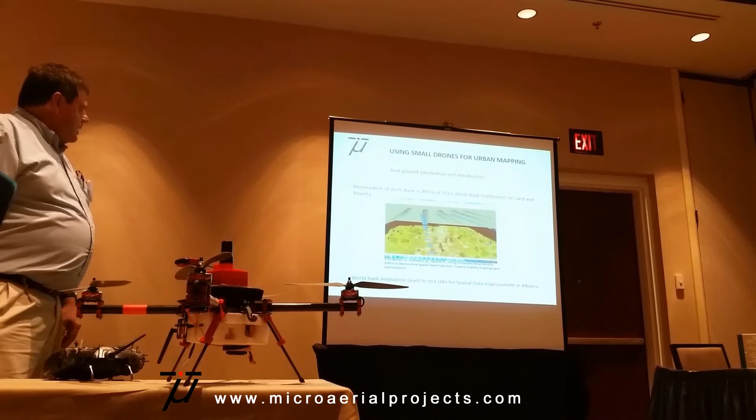In April 2013, we attended the annual World Bank Conference on Land and Poverty, myself and Grenville Barnes from the University of Florida, and we gave a paper on some of the work I did in Africa before, motivating for using small drones of this kind to do boundary adjudications and cadastral mapping. As a result of that, an employee of the World Bank applied for an innovation grant, got some money, and off we went to Albania.

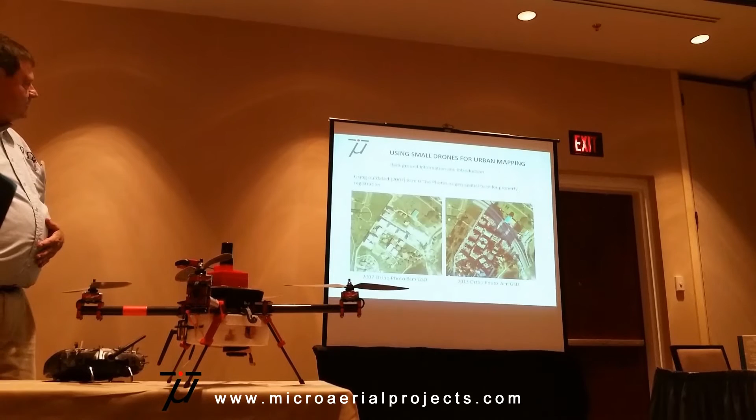Next slide please, Oliver. To test UAV technology in a scenario where they are desperate for any good quality geospatial data. Albania came out of communism in the early 90s. Before that, they had suffered years and years of really abusive dictatorship.

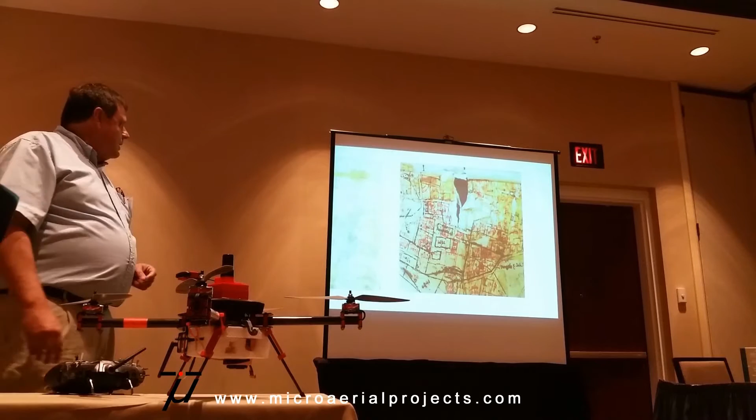The whole concept of property and ownership of property has always been, and is still, very new to them. Donors helped them digitize whatever communist cadastre they had. They were organized in kolkhozes, and these were supposed to be dissolved, and property was privatized, land was privatized. So they were given digital copies, but unfortunately somebody made the mistake of giving them hard copies as well. So instead of being forced to do their work digitally, they did it on inadequate hard copy material.

So this is how property is registered in Albania today, sorry, the light is a bit bright here. You'll see the value of the buildings going up on the basis of these property rights is substantial. But I would like to see any American title insurance company get involved in Albania. Anyway, they are desperate for better spatial data quality. Next one.

What's up, the computer's slow. So, what they are doing: since 2007, they were given countrywide coverage of orthophotos, in the urban areas at 8 centimeter resolution, which is rather high, and in the rural areas about 30 centimeter. They are supposed to use that orthophoto to perpetuate this property registration business.

In 2013, this just shows you why it's necessary that they get better data quality, not only improved but also updated. On the left-hand side here, you see some peri-urban development, and on the right-hand side, 6-7 years later, that's what it looks like. But they have no record of it. So when property gets registered now and subdivided, somebody just estimates little squares on those ugly maps that are shown. That's the background. Next one, Oliver.

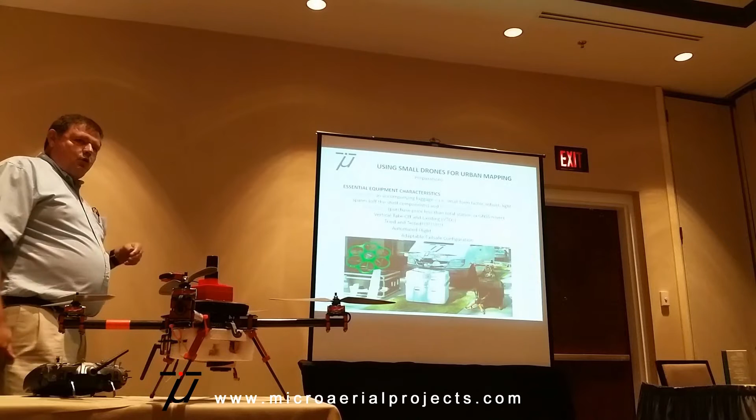Having been in this business rather early, there was not much choice in UAV platforms other than going to the Germans, basically. That's where the first multi-rotors came out. So we hung out with German proprietary manufacturers for quite a while and spent $50,000, $60,000 on single shell platforms, extremely expensive, very vulnerable, not repairable anywhere but in their own shops, subject to all sorts of import-export restrictions. So we knew we could not go there.

Apart from that, we also had to go to a developing country, so affordability was a big deal. Because time is so limited and establishment costs are so high, we had to go low cost.

We also wanted to make sure we didn't get blocked by proprietary resistance - we want a function like right now, and we don't want to put down money and wait another year until the function is released. Especially fail-safe measures are very important to an operator of UAVs - an operator has to carry the risk after all, not the manufacturer. So it was important to us that we had access to the brains of it all to be able to adapt the platform for our particular purposes.

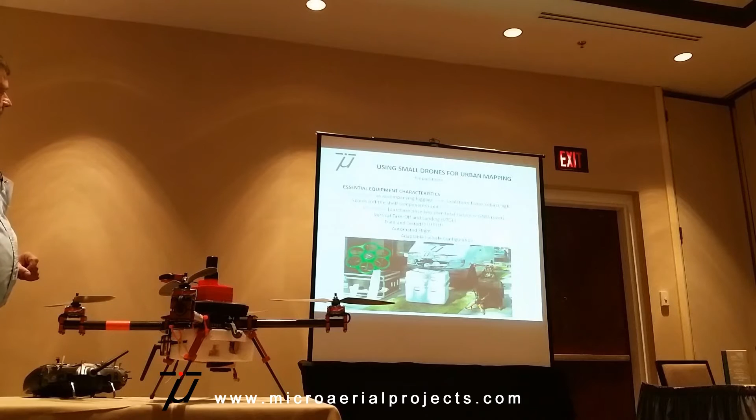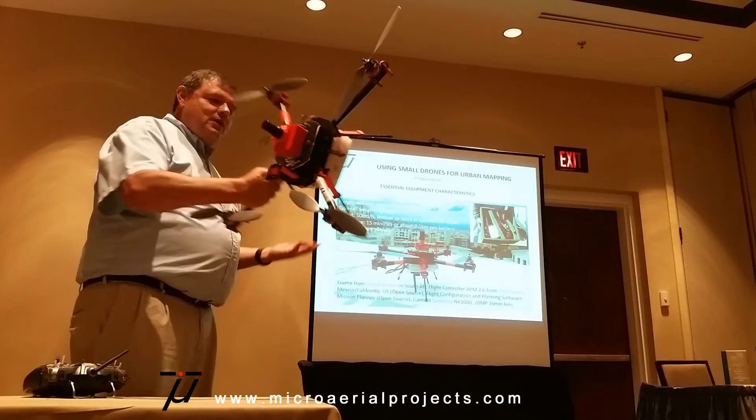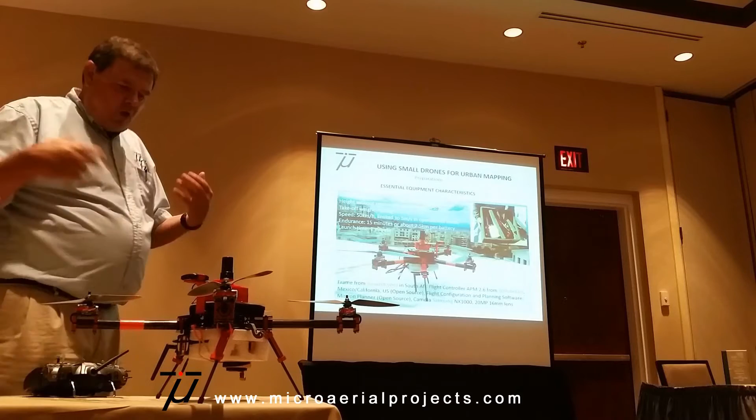So we ended up with this platform - feel free to come around later on, lift it. It's robust, okay? It's very simple, weighs less than 2.5 kilograms. We forfeited the gimbal - everybody talks about whether you have a 2 or 3 axis stabilized gimbal or something. None of that kind. We kept it as basic and as simple as possible for the obvious reason that you have to mitigate the risks. So you want to be as low in the sky, as light as possible, and as slow as possible.

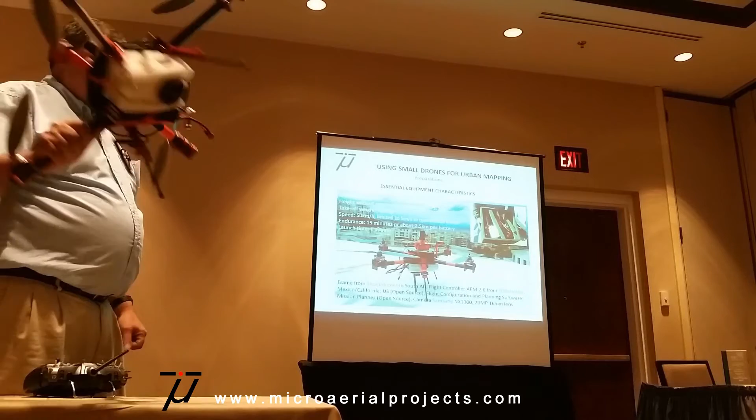That's how we came up with this platform, which is basically assembled from off-the-shelf components. Amazon.com gets you all of this stuff in front of your doorstep. The frame, for example, is made in South Africa, and not because I'm from there - we just happen to find them on the internet. The flight controller is made by 3DR in California, from Mexico.

It's totally open source. Cameras from Korea, of course - $450, 20 megapixels, very reliable piece of equipment. And what's more, no fancy housing or anything like that. This is hot exchangeable, so if I don't like this camera I can take another one. If a better model comes out tomorrow, I haven't got $2,100 sunk in this - I just change the sensor as and when sensor technology develops.

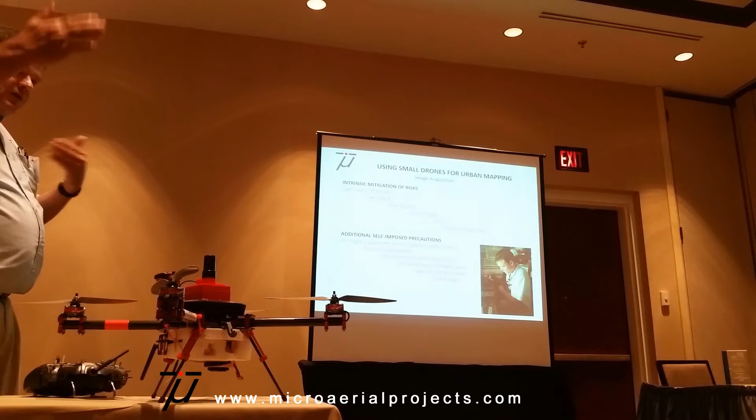So here are the intrinsic mitigation factors of risk. There is no regulation, there is nobody who's going to insure you, but the job has to be done. So what do you do? Keep the weight very low, keep the price low as well, low speeds, low altitude, keep line of sight so you see what's going on. You can't salvage anything in any case - if anything goes wrong, it just falls down, and you want to know where it fell down.

And then we have additional self-imposed precautions because there's no established set of rules, there's no handbook. So we devised our own kind of measures that we stick to ourselves.

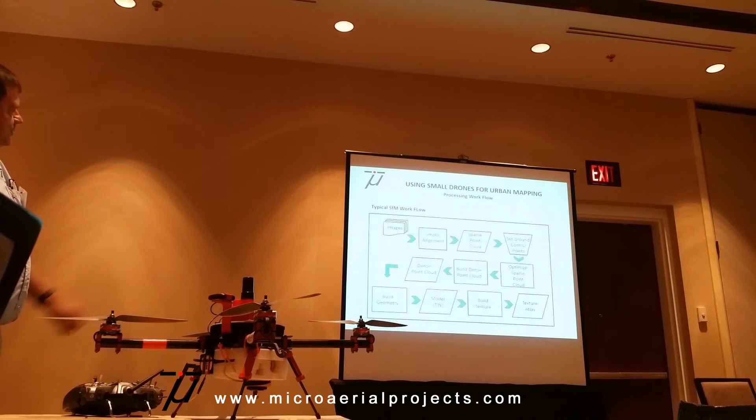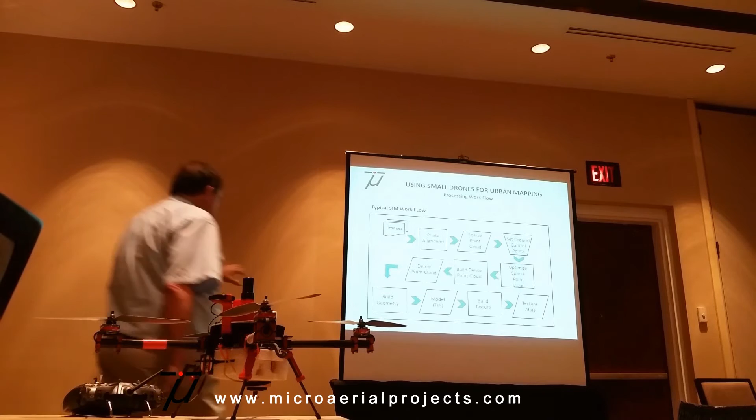So this big brick, we carry laptops along because we have to virtually start processing on site. Here's another way of demonstrating the workflow in a structure from motion approach. You put the images in. There's an approach where you can actually determine the camera coordinates very accurately in lieu of ground control that you could feed in there. Then you do what is known as a photo alignment. The result of that is a sparse point cloud.

And you set your ground control points. You observe the image coordinates, in other words. And then optimize the sparse point cloud geometrically. And then only do you build a very dense point cloud, which is the bulk of the effort in processing. And build geometry, build a TIN, get the model out, and wrap the colors around it. And you end up with a texture atlas and a 3D model.

It depends on the man behind it, or the team behind it.

Thank you. Thank you. Take a look at the title slide later.

So here's some products. This is a point cloud. This is a high density point cloud. In this one particular model, Oliver, just zoom out a bit, please. Sure. I don't know, I mean it's something like three digits of millions. So a little laptop can handle a lot of data as long as you're patient.

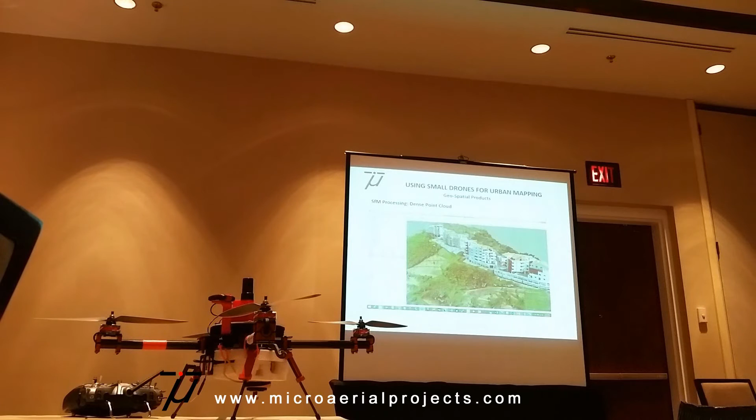It takes 80 hours to do 1,300 pictures. So next one, please, Oliver. It's coming.

When do you run it at a high density or medium, or typically do you? We always go for highest quality, finished. We don't even do the others, because the worst thing that can happen is if you find out it's disappointing, then you'd better do the high one anyway. Then after 40 hours you'd have to add another 80 hours. So we go straight away. But there are horses for courses, and the product has to be fit for purpose. Generally, at this early stage in the game, we always produce optimum quality.

Were you processing on that laptop? On that very laptop. So in fact, what you see here, Oliver and myself, and this equipment here, that's a mapping company from A to Z. You've got to add a battery charger, a soldering iron, a bag of spares, another laptop, and a lot of hard drives, external hard drives. And you've got a mapping company from A to Z.

So this is the thing, it's going to disperse, I guess. Lots of little entrepreneurs like us are going to try and make it, and then I guess in the market it's going to consolidate and suck all those up again. I don't know how it's going to work out.

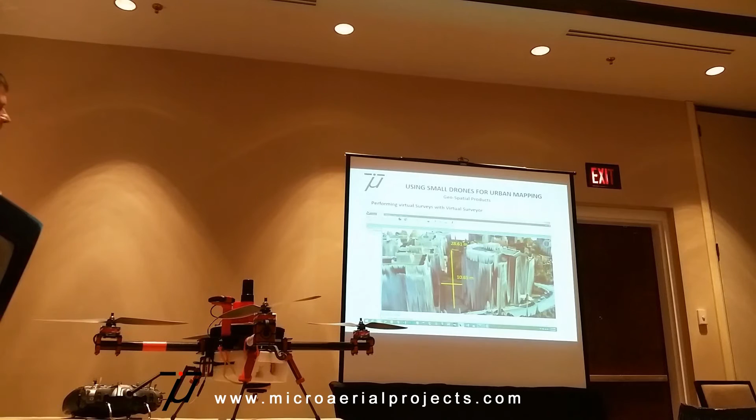Right, next one please, Oliver. Don't even know what it is.

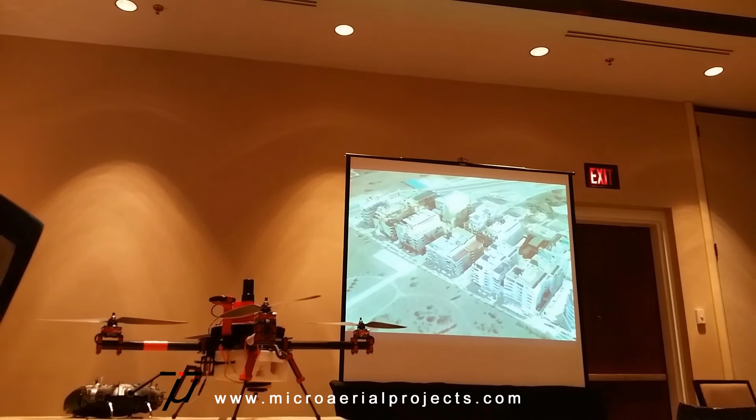This point isn't coming across very clearly here, but this is now a 3D model rendered in true 3D. You can see roof overhangs—just pan a little bit there, you can see that sort of thing now. But for that you need a rendering machine that accepts more than just raster data, so you have multiple elevation values on a pixel. It also requires that you micro-task the modeling of individual buildings. You can't just say, here are 1,000 photographs, make a model of the city for me—there's not enough memory in the world to do that efficiently. So normally you map a whole area, make a normal 3D model of it, without being too interested in the full 3D aspect. So you have a city model, and then you take each building individually and model it with much more computing resources per building than you would otherwise have. Then you get the kind of resolution that makes the individual models really valuable. But of course it has to be fit for purpose, and it's only of interest if you care about individual buildings. Here we populated a Google Earth terrain with 3D models individually processed in PhotoScan.

Next slide please. And then, of course, if you really want to go overboard, you can add oblique photography to get ultra-rich, really realistic rendering of buildings.

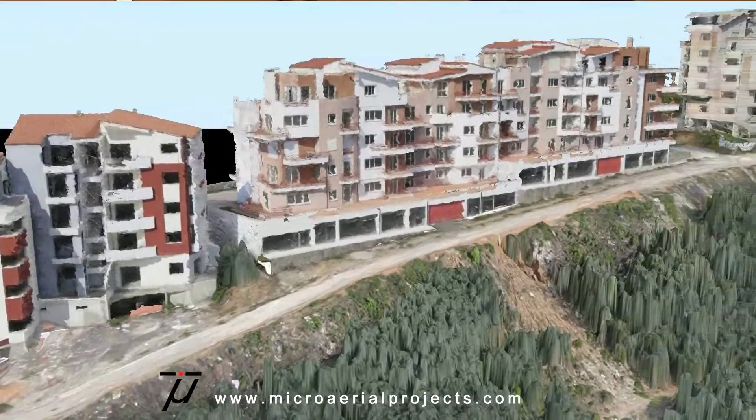We have a couple of questions. Just, there's still something going on here. Oh sorry, no, this is not happening—dynamic rendering, sorry. Yeah, I just wanted to announce it's going to be over soon. Sorry, I thought you were finishing up. I was like, oh, we have more questions. My apologies.

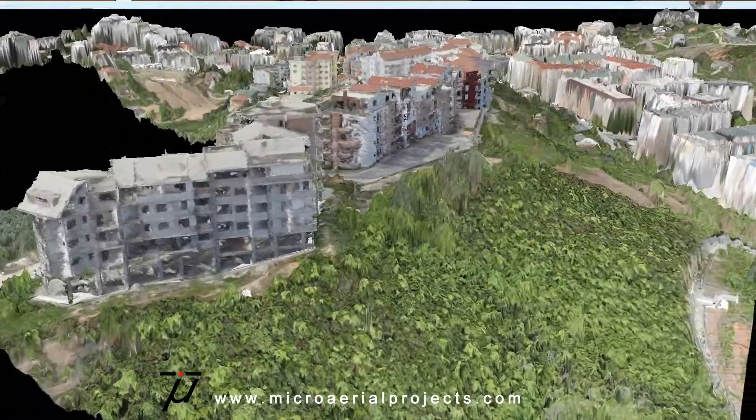So this kind of rendering also invites discussion—you don't need to be an engineer to interpret these kinds of drawings, plans, or products. You'll notice the quality of the buildings on top of the ridge is much better than down the hill, because down the hill we didn't add oblique photography.

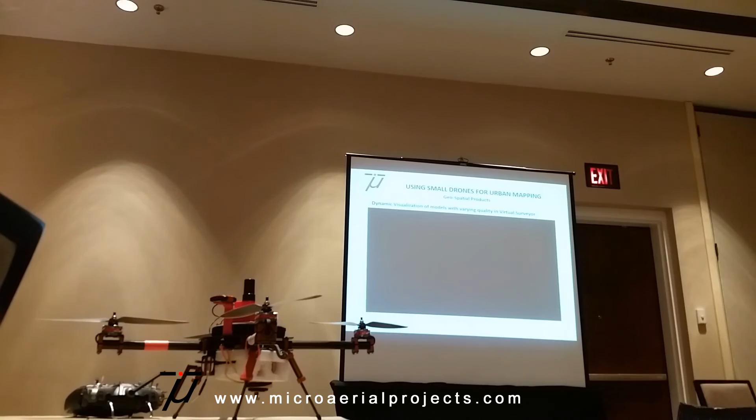Want to keep it brief? Go ahead. One of the first questions I was going to ask is about oblique photography with that last shot.

So we had about six to seven points over 30 hectares, and we actually organized the job in such a way that we have seven blocks, and we performed a separate adjustment for each block. And where the two blocks meet, we could then compare how good our mapping was, and that was very enlightening to us. So I'm quite confident, since one expects the biggest errors to be on the seam of it, where there's the least amount of overlap, that we did get about 10 centimeter accuracy generally on these models, and that's with minimal control. Only six points per 30 hectares is really sparse.

What we did at the same time, but that wasn't part of the mission of our client, is we flew this with a dual frequency GPS receiver attached to the drone all the time, linked to the camera, and so we recorded the event of each exposure. We have this data now, and we're going to process it, and make some kind of analysis on whether we couldn't perhaps get away completely without any ground control, just using airborne control.